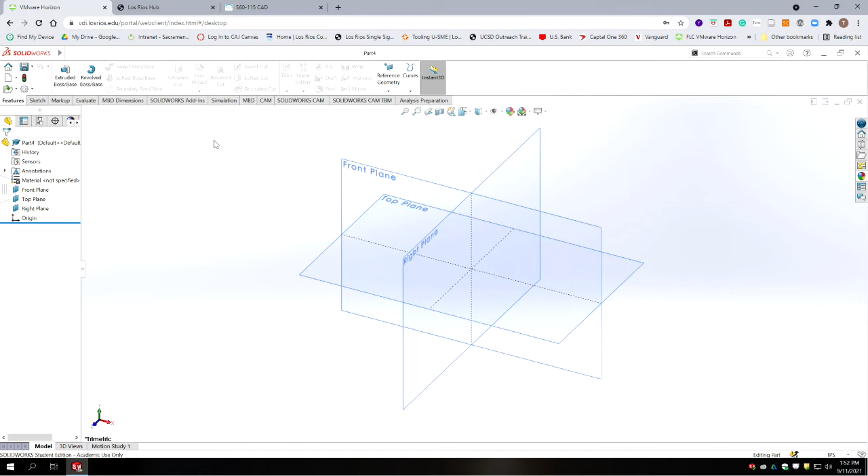Okay, so here we go. We're going to go to SolidWorks. And we're going to create a new file, another part file. Alright, and then we'll make our standard planes visible. And we're going to sketch in the front plane. And we're going to do our sketching so that we're straddling the other plane here to build in symmetry.

So if I were to go back to this view here on the left, we go from center line, we jog up, we go left horizontal, we've got an angle, we go left horizontal again, have an angle, go horizontal again, radius, straight down, and then back. Okay, so let's see if I can roughly sketch at least half of that.

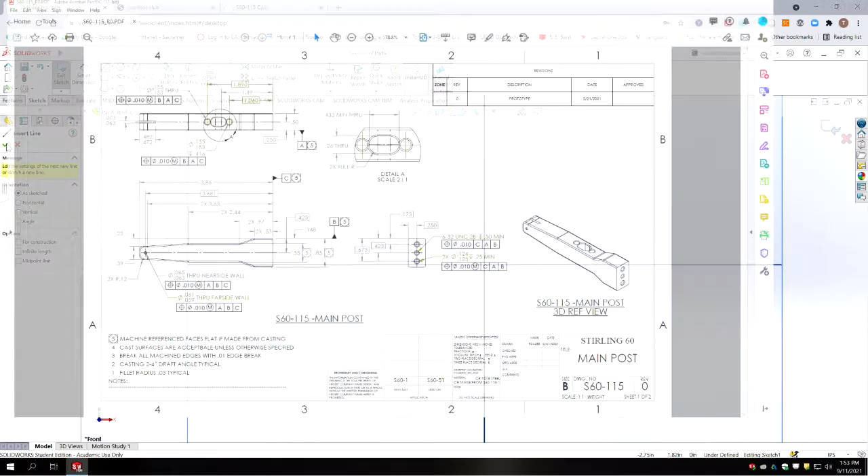So I've got the line tool selected. Horizontal, angle, horizontal, angle, horizontal. We've got a radius, and then we go to vertical.

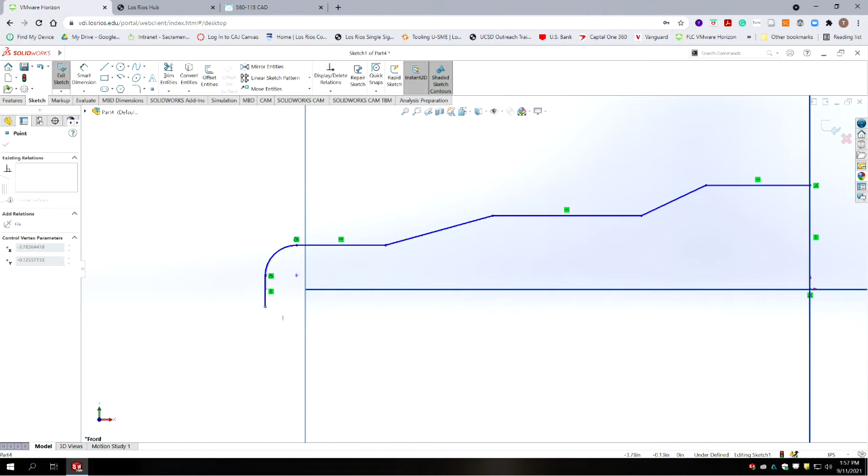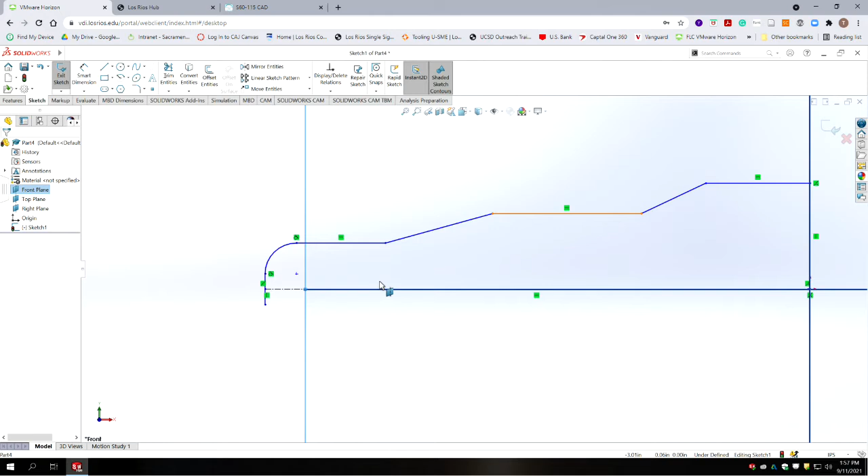Okay, so I'm going to draw a center line that goes from the midpoint of the line at the top of the part, and it's going to go back to origin. And I should be able to make that line then horizontal. So now anything I draw on this side should be fairly symmetrical. Now I'm going to dimension all these features as they are.

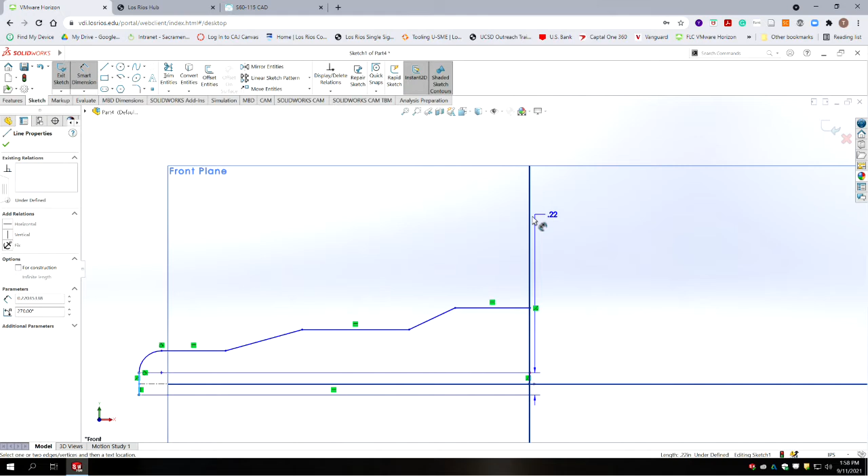So we go back to our drawing, and we're going to start with the overall length. So go from that to base, which gives us 3.860 inches. Okay, so the next dimension we're going to put in is the radius on the end. So we look at our dimension, and it's called as 2X R.120. Okay, that shrinks in size.

Then we're going to go to the next intersection point to base. And our drawing has that at 3.630 inches. Okay, then we go to our next dimension at the next peak. From there to base, drag our dimension up. And according to our drawing, that dimension is 2.440 inches.

Alright, then we go to our next angle, which according to the drawing is .970. And then our last dimension from base is .530. Okay, so that's all our lengths. Now we need to do our widths.

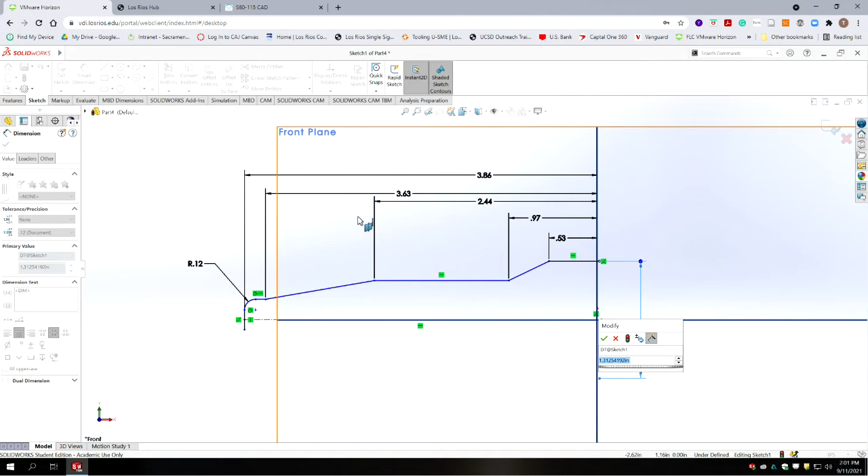So our most extreme is .850 on a width, but we're only doing half of that. So we go to our center line, and we're going to put in .850. Okay, the next point to our center line is .550.

And then our last flat, according to print, is .390. Alright, so we have basically most of the shape we need. Now we're going to use the sketch mirror command.

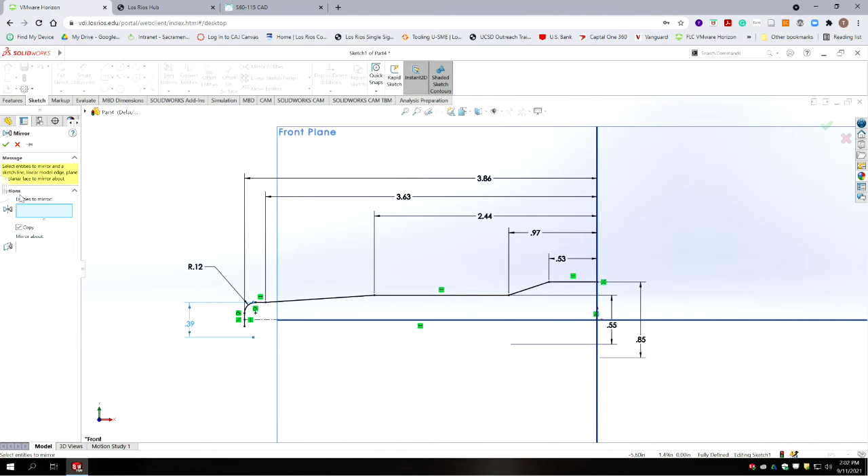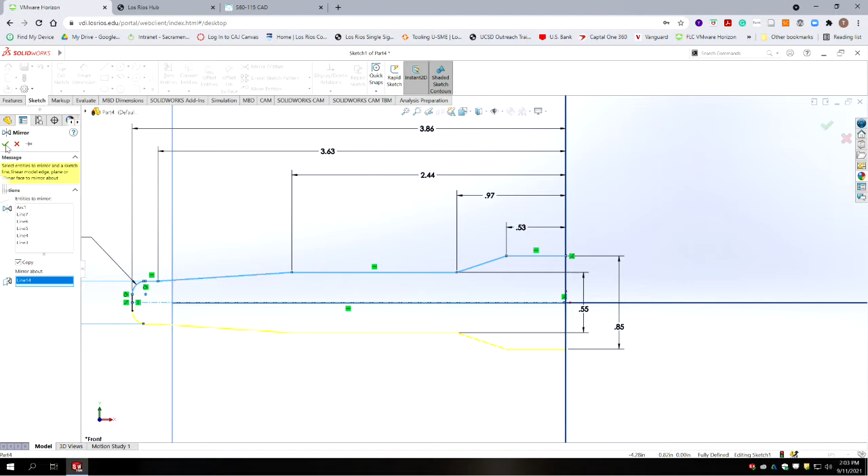So we're going to go to mirror entities, and we're going to select our entities. Our entities to mirror are going to be the arc, the horizontal line, these angles, and this line. And we're going to mirror about the center line. And you get a preview here in yellow. We're not going to mirror this line because it's already the true length of what we need. So it puts in all these mirror relationships. If we change any of these dimensions, it'll change both sides.

And I don't know if you noticed, I deleted the line I initially had vertically here. So we need to put a line that merges the bottom. It should turn black at this point. And if I exit line properties and exit line, we should have a fully constrained sketch.

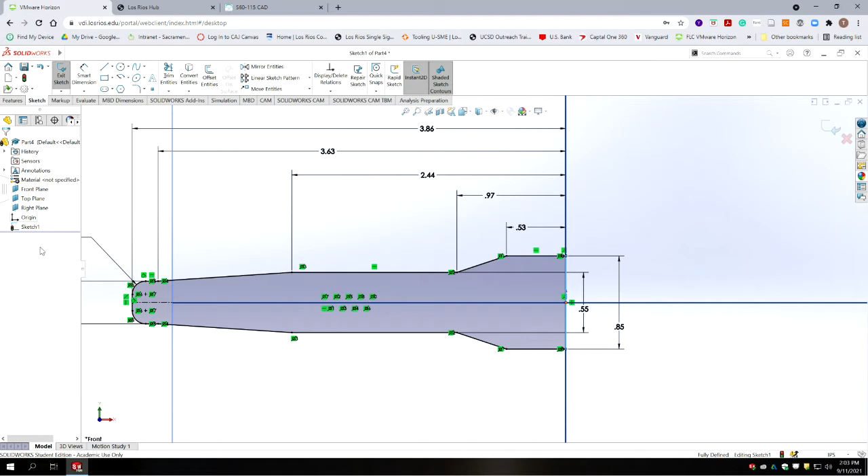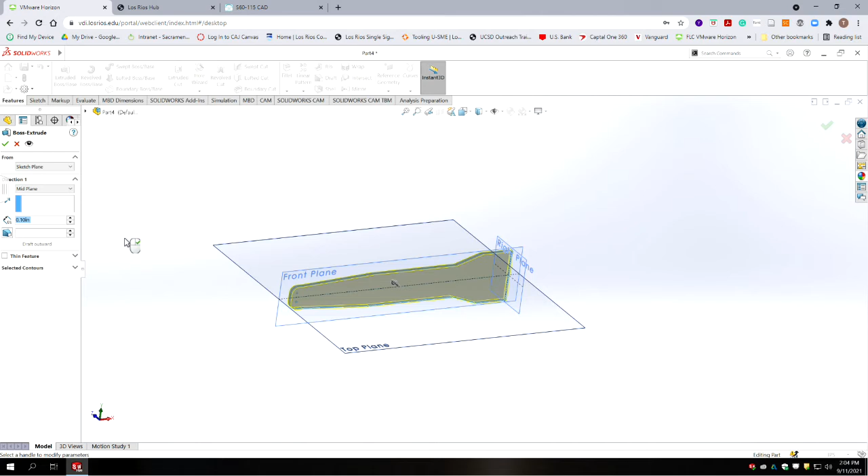We're going to look at this in a 3D view. We're going to exit the sketch. We're going to make sure it's highlighted. We're going to do features, extruded base. Again, we're going to switch to mid-plane, and we're going to extrude .500 to give us our thickness. And there's our base feature now.

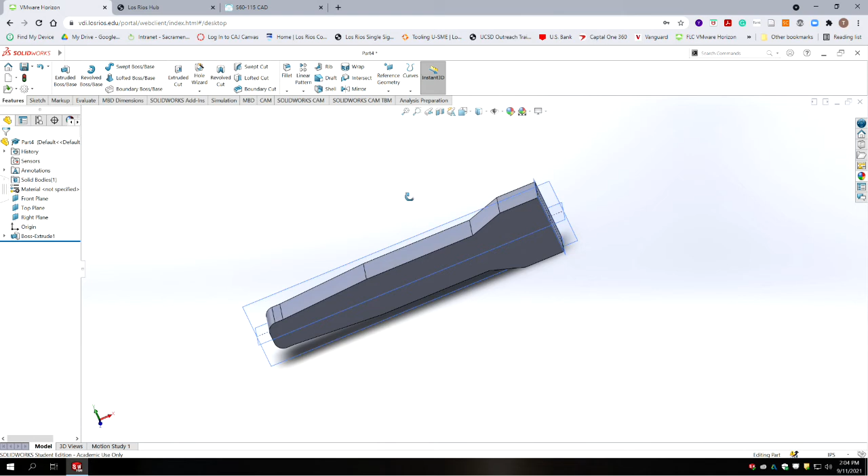Okay, so now we're going to make the rest of the features that we can see. We've made all the features from the front view. Now we're going to switch to the features we see from the top view. And I think we're going to start with the slot over here.

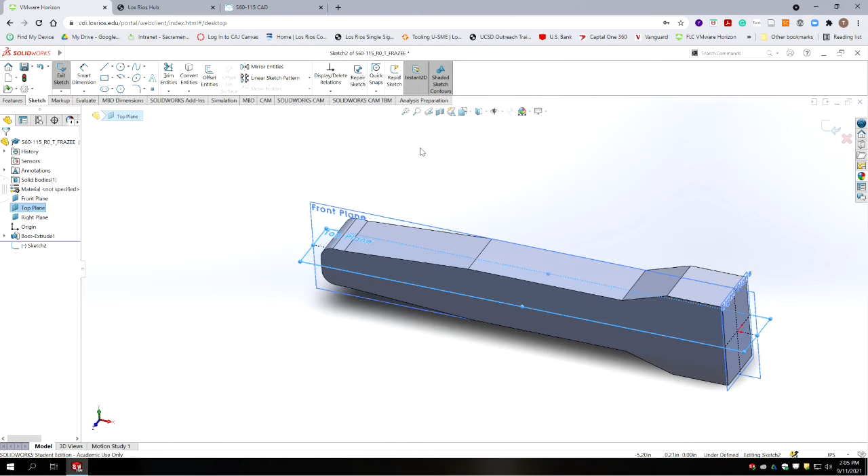Okay, so we're going to go to sketch mode. We're going to rotate the view. We're going to select the front of the top view as our sketch plane. And so we have a slot here, similar to how we made the last one.

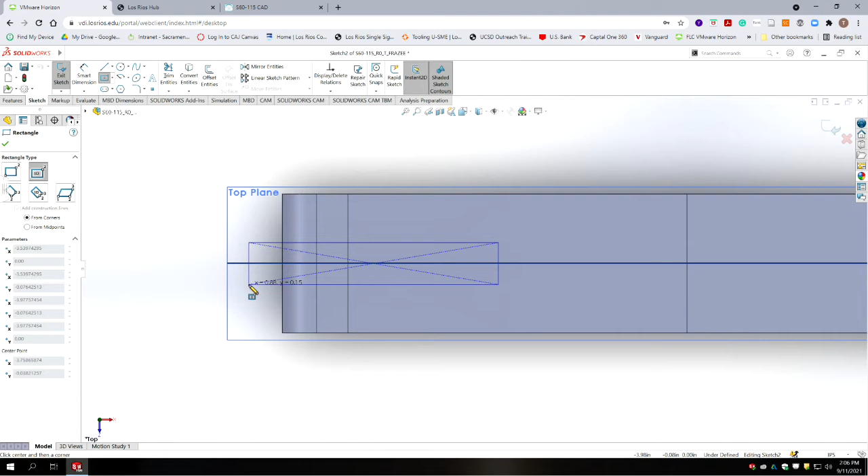We're going to go in here and we're going to use the center rectangle function. We're going to select the intersection with a plane that's normal to the viewing plane. And we're going to attach it to the top of the model. So it has to be centered on the center line, and it has to have one end attached to the top of the model. Now let's throw our dimensions in.

So we've got a depth, and not sure where that's called from, so let's look at our drawing. Yeah, it's a depth called from the top. And the dimension is 472 to 482. So if we split the difference of 10 thousandths, that's going to be 477. Okay, let's go to 3 decimal points on our tolerance display.

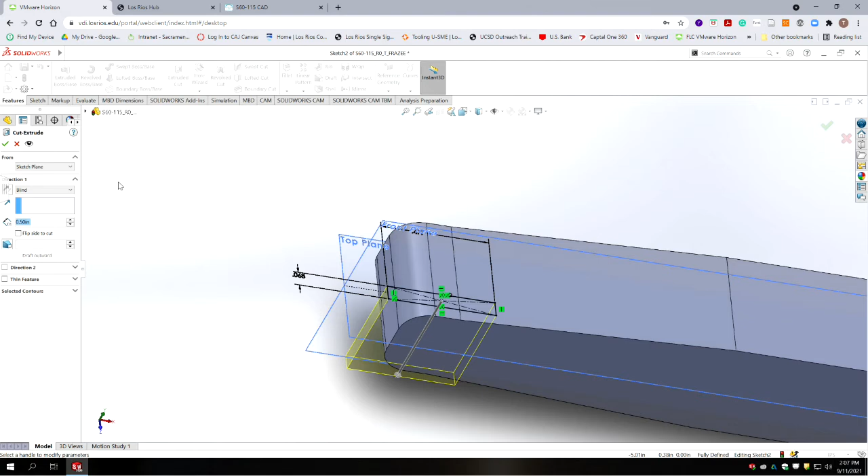We're going to go to a 3D view. We're going to do features, extruded cut. We're going to switch that to through all, both directions. And select OK. And we've got our slot to accept the rocker arm.

Alright, so in this side plane here, in the top view, we have a blind straight slot and we have 2 holes. One of them is a through hole and the other one is a blind hole. And then we have a detail view showing a blown up version of it.

So because this is a through feature and the hole on the left is a through feature, we could make them in the same feature. But in case we need to make alterations to one of the features that's staying independent, we're going to do those as all separate features. So we're going to start off with the slot. And so let's go back to our model.

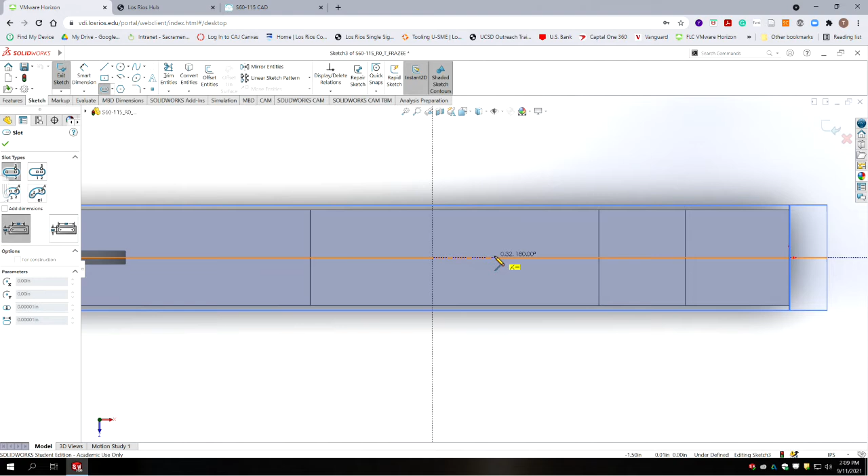And we're going to sketch. And our sketch plane is going to be on the top face of the model. We'll change our viewing orientation to be normal to it. And we're going to sketch a slot feature. And now we need to give it dimensions.

So, according to the drawing, we're 1 inch, 490 thousandths to the center to the base. 1 inch, 490 thousandths. So we're going to go from the bottom of the slot to the bottom of the part, 1 inch, 490 thousandths. That puts the position of the bottom of the slot.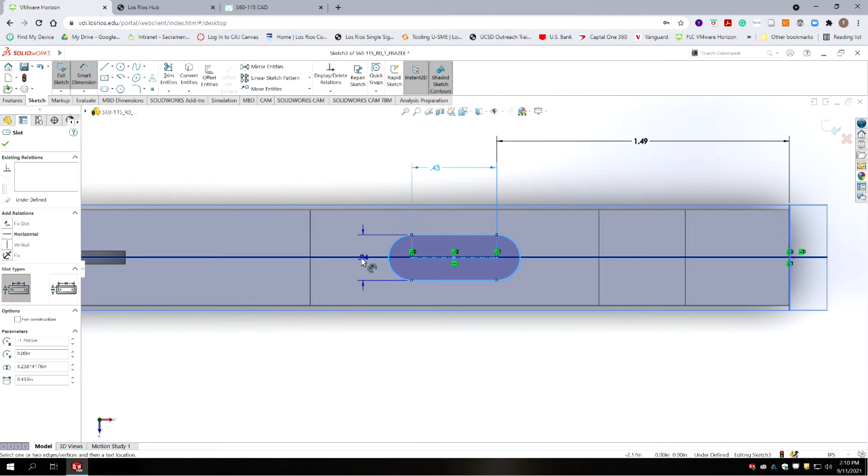We go back to the drawing and the distance between the centers of the arcs on the slot is 433 thousandths. So let's put that in. And we have a full radius, but our width of our slot is 260 thousandths. Alright, so we should have now a fully constrained sketch of the slot.

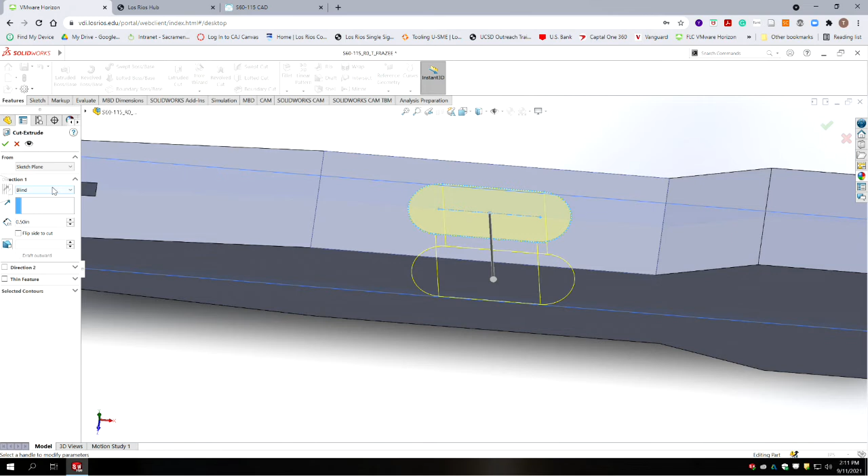We're going to exit the sketch. We're going to make sure it's highlighted. We're going to do features. We're doing extruded cut. And in this case, it's going to go from blind to through all. And now we have our blind slot going through the feature. Now we need to straddle this with our 2 holes.

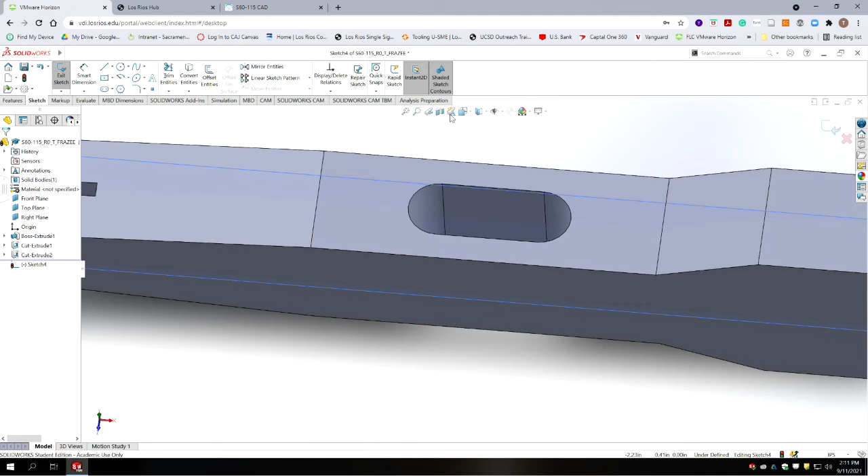So we're going to go sketch. We're going to sketch back on that original same plane. We're going to look at the model in the prior view. It should be straight on. Now we're going to go ahead and make a circle. We're going to give that circle a diameter, which is 155 to 153, so we're going to call that 154.

In diameter, and our distance to base, so from there to the base of the part, is 1 inch 260 thousandths, and that should be fully constrained. So we're going to go ahead and accept that, and we're going to do features, extruded cut, and our depth is going to be blind, and the depth of this hole is 416 thousandths.

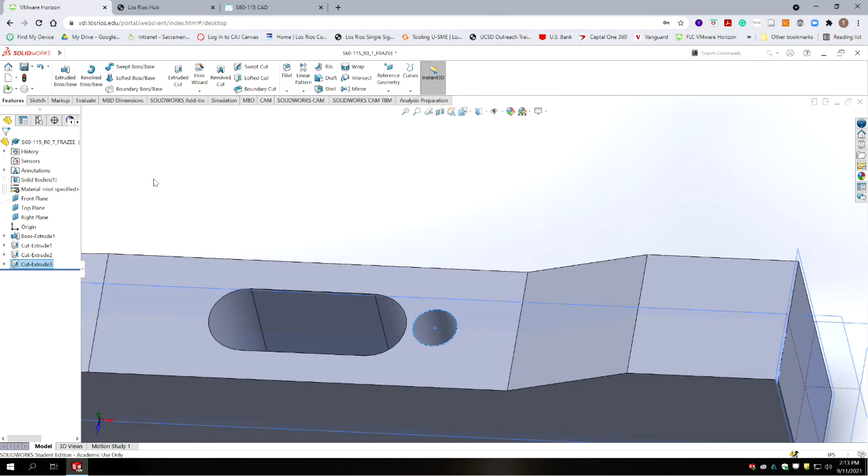Okay, so it doesn't go all the way through the part. It's got a bottom to it. Okay, we're going to save.

Now we're going to sketch our second hole. We're going to sketch on the plane and draw our circle. We'll exit circle mode, highlight the center of the circle, select the front plane, and make that circle coincident to it. Then we'll highlight the circle, hold Control down, and highlight the edge of the other hole, and make them equal in diameter.

Now we're going to do a dimension from the center of that hole to the base. According to our drawing, that should be 1 inch 890 thousandths.

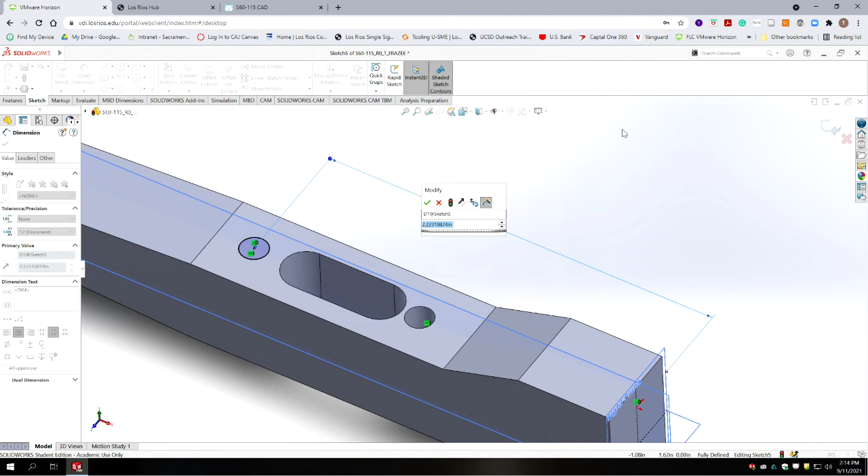It looks like we got a mistake there. So I've got a hole going right through my blind slot. Not a big deal. Let's roll back to that feature and see what I did wrong. I'm going to edit the sketch.

I had a dimension to the bottom of 1 inch 490 thousandths, which is correct, and then a spacing between the centers of that slot. So I selected the centers and not the outside edges of the slot. So I made a mistake with this dimension.

Not a problem, let's go back and fix it. So I went from center to center, but that was supposed to be from edge to edge. So I'm going to highlight that dimension and delete it.

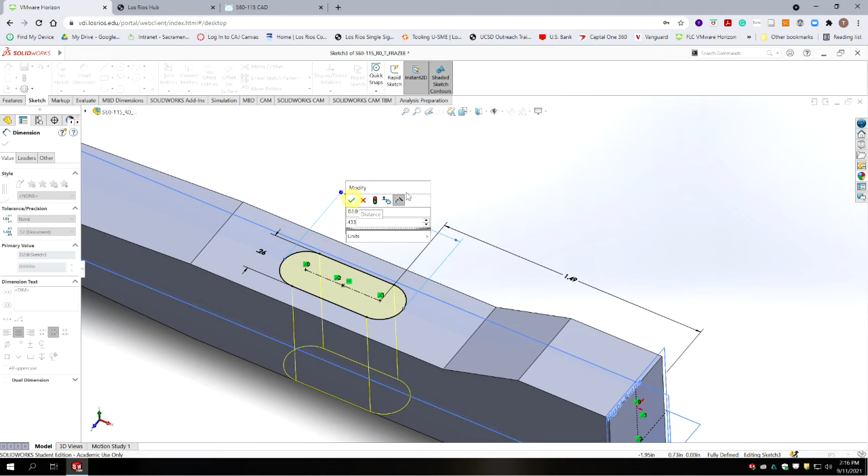We're going to go back to the dimension tool, and holding the shift key down, I'm going to select the two radiuses that make up the end of the slot, and that should be 0.433. We'll accept that, and our slot's significantly smaller now.

Let's hit accept on our slot, then roll back forward, and now the positions of our holes look more correct. Go ahead and highlight the sketch that we made of the circle, and now we're going to go to features, extruded cut, and make that one through all, and accept.

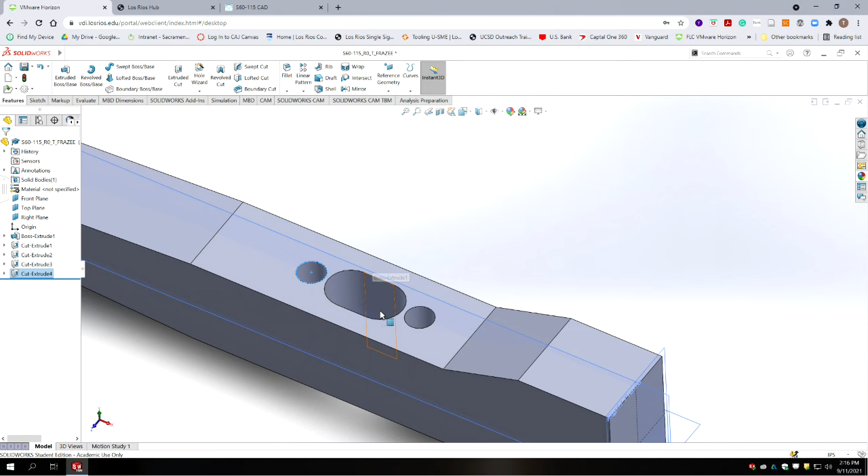Alright, sorry about that mistake, but it shows how you can use the history to roll back and fix a model when you realize there's an issue.

Okay, so now we're going to put the hole that goes in the front of the front plane that goes through for a pin, and that pin is the pivot point for the rocker arm that goes in that slot.

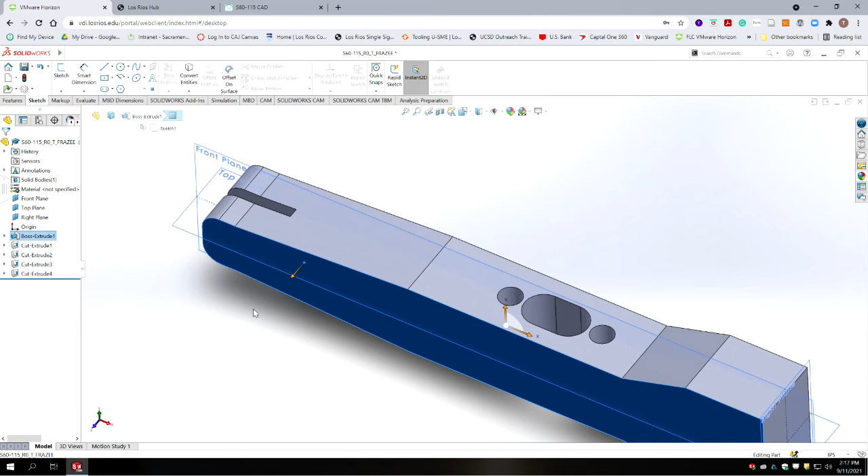Okay, so we're going to go to sketch. We're going to sketch on the front plane of the part and look at it in that orientation of the sketch plane.

Okay, we're going to draw a circle, intentionally draw it up at the top, and give that circle a diameter. Looking at our drawing, that diameter is going to be the smaller of the two. There should have been a revision in this drawing, and there should have been only one hole size. So if your revision of the drawing shows two hole sizes, one on the far side and one on the near side, we're using the far side diameter hole that's going to go all the way through.

So it's a 61 to 59 hole, and the median of the tolerance is 60, or 60 thousandths even. So we're going to double click our dimension and make that 60 thousandths even. I'm going to go ahead and go to 3 decimal points to make it clear that that's 60 thousandths even. We're going to exit the dimension mode.

We're going to highlight the center of the circle, and highlight the plane that intersects our sketch plane, and make those coincident.

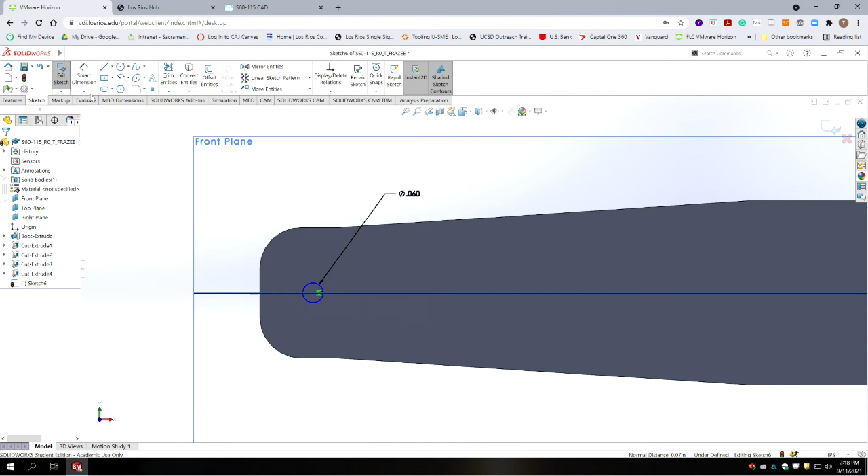And now all we need is a dimension from the center of this circle to the base. We reference the dimension from the base for that feature as 3 inches 681 thousandths.

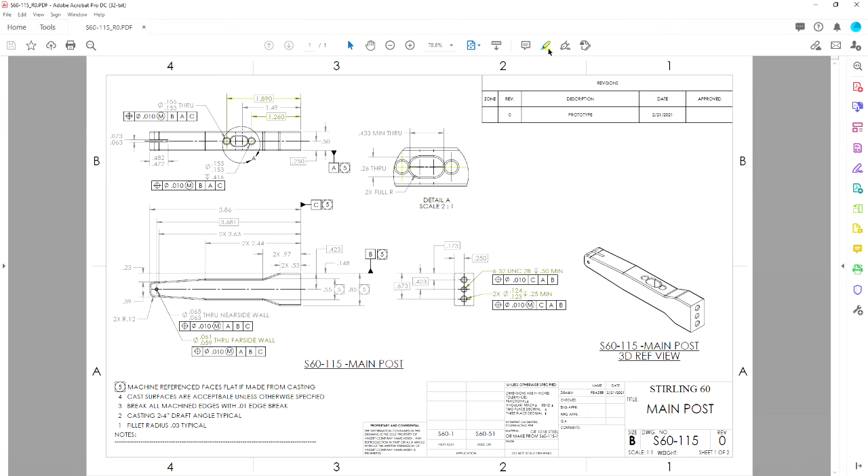Okay, we're going to accept that position, highlight the sketch, and do features, extruded cut. It's going to be through all.

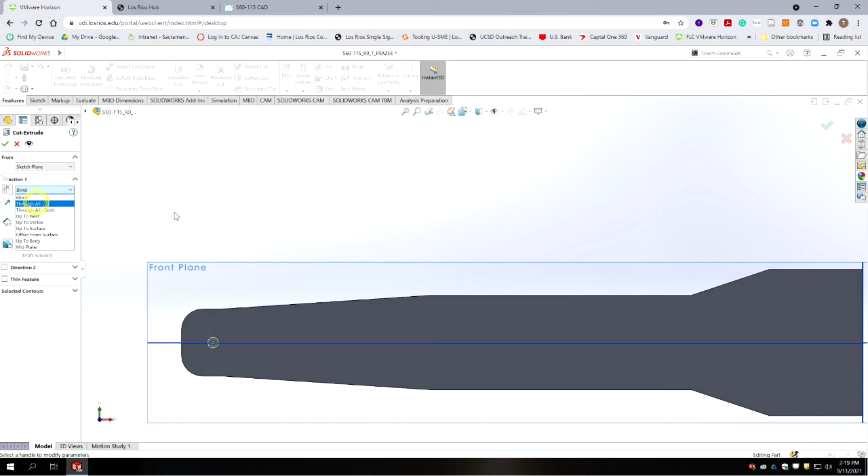And we're going to accept, and we should have... oh, let's go back. It's going to be through all in both directions, and accept that. And we should have a pinhole going all the way through.